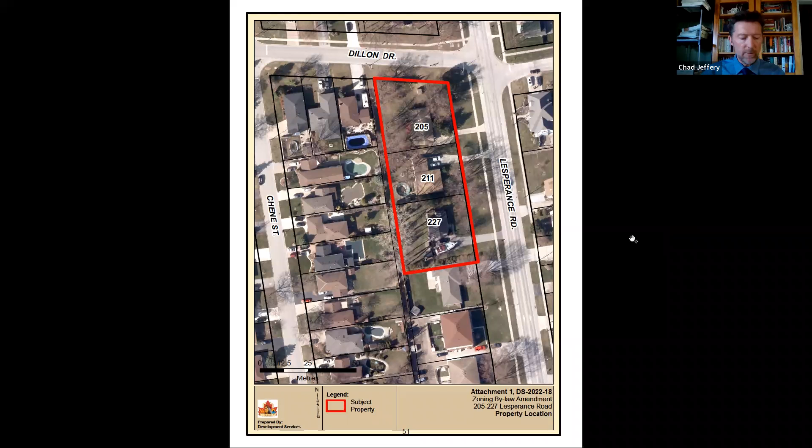Attachment 2, please. The surrounding area is predominantly low density residential, denoted in the yellow tinge, with the subject property outlined in red again. Farther north at the intersection of Riverside Drive and Lesperance Road is a commercial node, and to the south, shaded in orange, there are 2-story 4-unit dwellings, south of which is a medical office at the corner of Little River Boulevard and Lesperance Road. Farther west along Little River, on the south side, is the Arrowhead Municipal Park. Along the west side of the subject property is also a 10-foot wide municipal alley that contains hydro utilities, but it doesn't form part of the subject property.

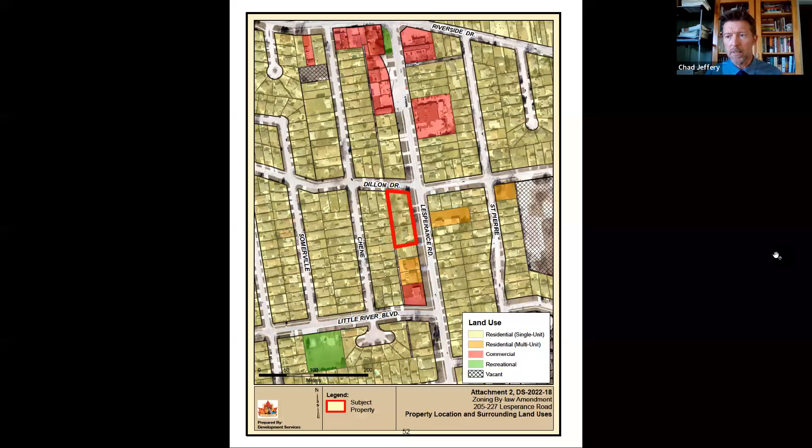If we could turn to Attachment 6, please. This shows the existing zoning as R3. Again, as the mayor noted, the proposal is to change that from Residential Zone 3 to a site-specific R3 zone that would facilitate 4 dwellings for a total of 24 units. I should note that the current R3 zone, which applies to the property and surrounding area, permits multi-unit dwellings such as townhouses or row houses at a height of 10.3 meters, but doesn't permit the 6-unit apartment style dwellings proposed through this application.

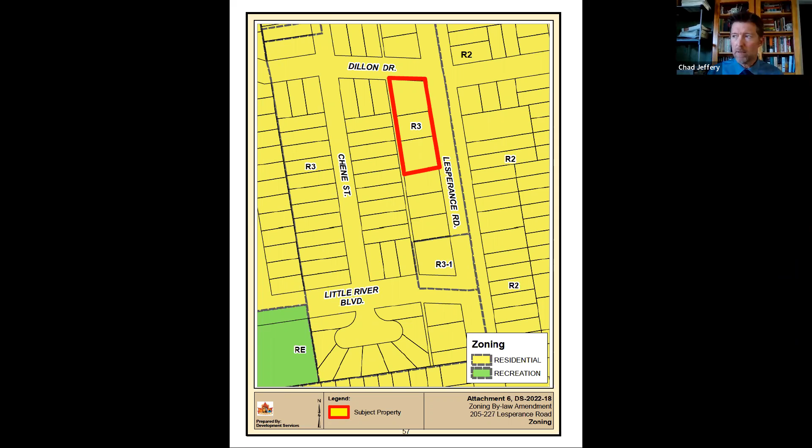Attachments 3, 4A, and 4B in our report show the proposal: 4 buildings of 2.5-story, 6-unit dwellings with two-bedroom units, floor area of 1,400 square feet. There's a sidewalk to each dwelling unit from Lesperance Road, and a centralized amenity space in between the units, about midway down the subject property. A 37-car parking area exists to the west of the dwellings, and there's going to be a 5-foot landscape buffer strip along the westerly side of the subject property that will include either cedar trees or a fence, or perhaps both. That kind of detail will be determined through the site plan control process.

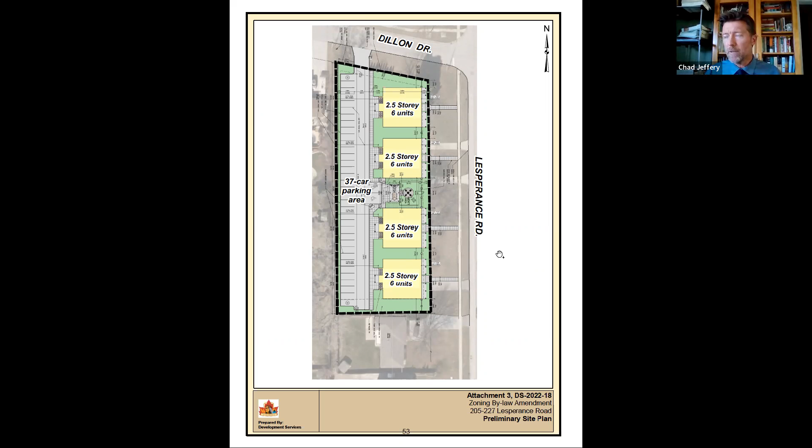The first floor of these units is partially underground, which is why it's only 2.5 stories in height. The proponents have provided, in attachments 4A and 4B, an artist's or architectural rendering of what the properties look like. At the top, you see a bird's eye view looking toward Lesperance Road from the west. The one on the bottom is looking from the east from Lesperance Road, showing the front of the dwellings.

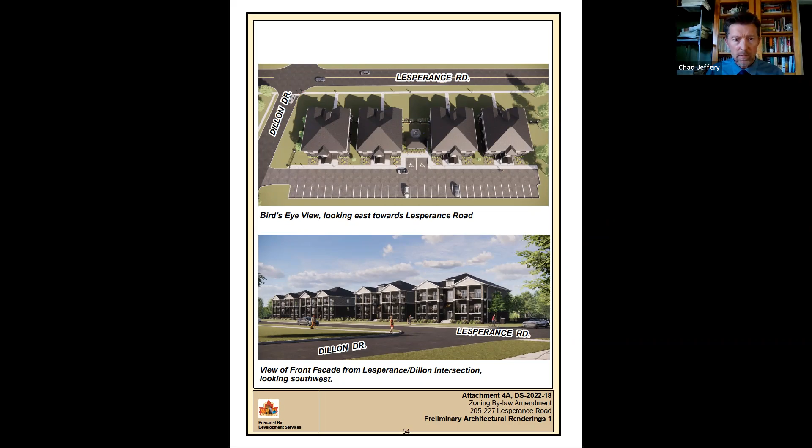The next shows different perspectives. Again, that's from the west looking east, gives you an idea of what the rear facades will look like across the parking lot. And then there's a view of the central amenity area at the bottom of that attachment.

The proponents have submitted supporting documents. In order for us to deem the application complete, they had to provide a planning justification report, a traffic impact brief, and a sanitary assessment.

Those reports came back indicating that it represents good planning, that it will have marginal impact on traffic operations, won't have an adverse impact on traffic operations in the area, and that there is sanitary capacity to accommodate this development. Administration has reviewed these reports and concurs with their findings.

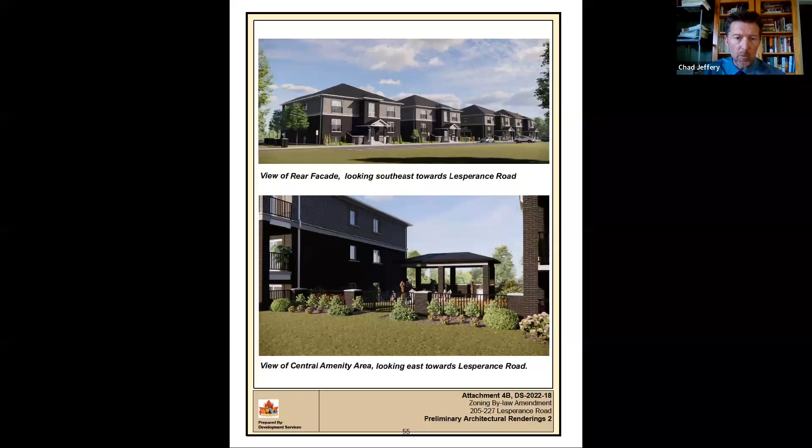We've also looked at this proposal in the context of the relevant policy documents, which are the provincial policy statement, the county official plan, and the town's official plan. Each of those documents is highly supportive of residential infill development, compact built form, making more efficient use of services, and providing for a range of housing types and tenures.

This proposal checks a lot of the boxes included in those policy documents. We've concluded that the proposal is generally consistent with the PPS, the provincial policy statement, and conforms to the county OP and the town's official plan.

Now, the council is not making a decision on the application tonight, because this is a public meeting for the purpose of receiving input from interested stakeholders. After this meeting, and after we've had a chance to address as many questions as possible, there will be a further report that will summarize the issues we've heard tonight and making a recommendation to council on the proposed zoning bylaw amendment. So, Mr. Mayor, those are my comments.

I will be available for any questions that council may have. All right, thank you very much, Mr. Jeffery. So then we'll go right into our delegations.

And our first delegation this afternoon is Mr. Christian Lefebvre, as the applicant, and Mr. Harry Froussios, the planner on said properties. So I will certainly turn the floor to both of you.

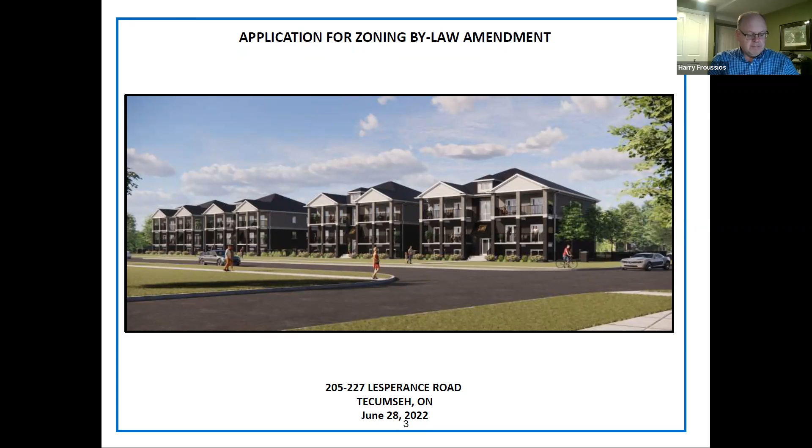As you've already seen in the previous slide, this property is located at the north end of the town of Tecumseh at the intersection of Lesperance and Dillon Drive at the southwest corner. Surrounding land uses include the commercial node to the north at Riverside Drive and Lesperance Road. There's residential uses in all directions immediately abutting to the west and to the south and across Lesperance and Dillon Drive, including multi-unit residential to the east, existing fourplexes to the south. There are also open space and recreational uses within walking distance of the subject property. Next slide, please.

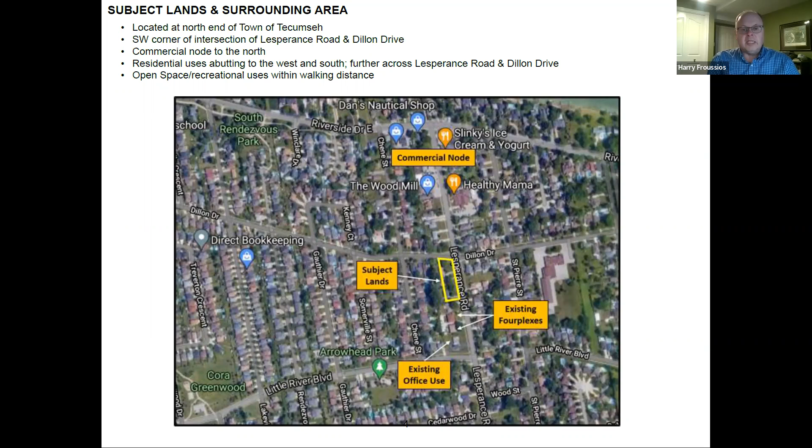And this is the subject lands. Just to orient yourselves, north is pointing to the left of the screen. As noted, it's 3 individual properties that have a combined area of just under 0.4 hectares and 1 acre. Frontage and access is along Lesperance Road and Dillon Drive. 3 standalone single detached dwellings are to be demolished as of today, to make way for the proposed development subject to the rezoning application that's before you tonight. Next slide, please.

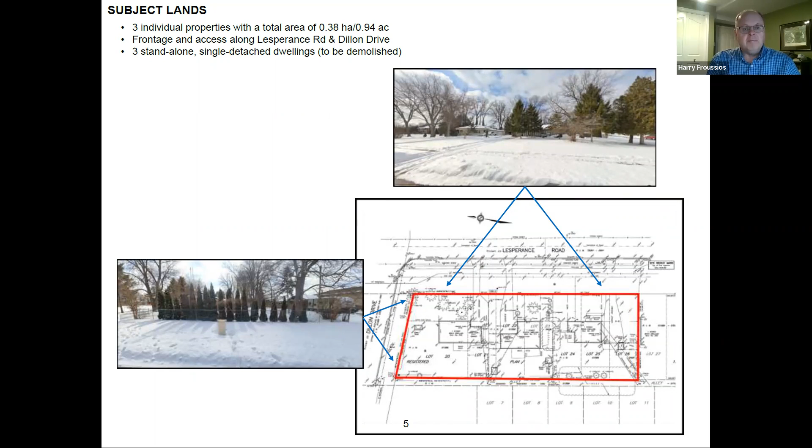In terms of the policy structure with the town of Tecumseh official plan, the lands are designated as residential neighborhoods in the community structure plan. They're within the town settlement boundary and within an urban area that is the focus of growth, public-private investment, and all significant development within the community. The subject lands are near a commercial node to the north, as well as community nodes within proximity of the subject lands. They're also located along a main road corridor, which is Lesperance Road. Next slide, please.

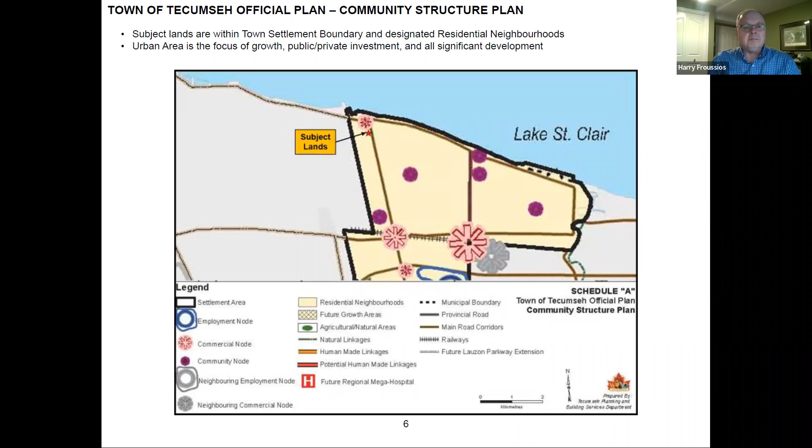In the North Settlement Area Land Use Plan, the subject lands are designated residential. The proposed form of housing, a 6-unit dwelling, and the density proposed is consistent with the type of housing considered appropriate within the high-density residential policies found within the residential designation.

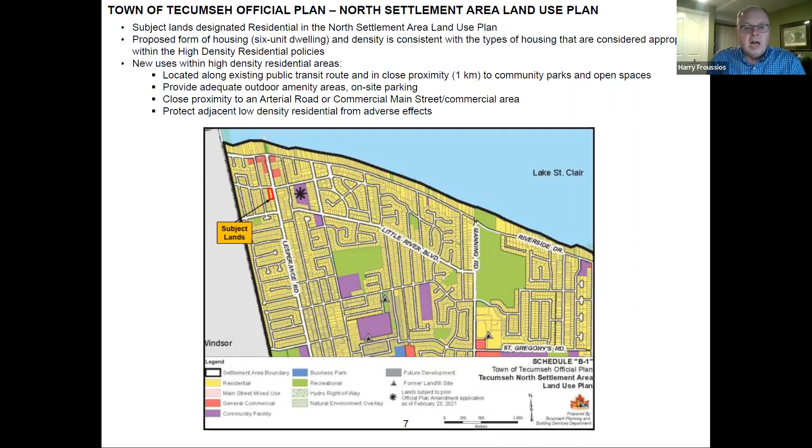For new uses proposed within high-density residential areas, there's a number of criteria we need to satisfy: the site must be located along an existing public transit route and in close proximity, approximately 1 kilometer, to community parks and open spaces; provide adequate outdoor amenity areas and on-site parking; be in close proximity to an arterial road or a commercial main street/commercial area; and protect adjacent low-density residential uses from adverse effects. As we will see in the upcoming slides, we satisfy all of those criteria.

In the zoning bylaws noted by Mr. Jeffery earlier, the subject lands are zoned Residential Zone 3, the R3 zone, which applies to the majority of the lands on the west side of Lesperance Road between Little River Boulevard and Riverside Drive.

A wide range of uses are permitted in the R3 zone, including single detached, semi-detached, and multi-unit type dwellings, such as duplex, triplex, and townhouses. A maximum residential density of 30 units per hectare is already permitted, and a maximum height of 10.6 meters is also permitted in the R3 zone.

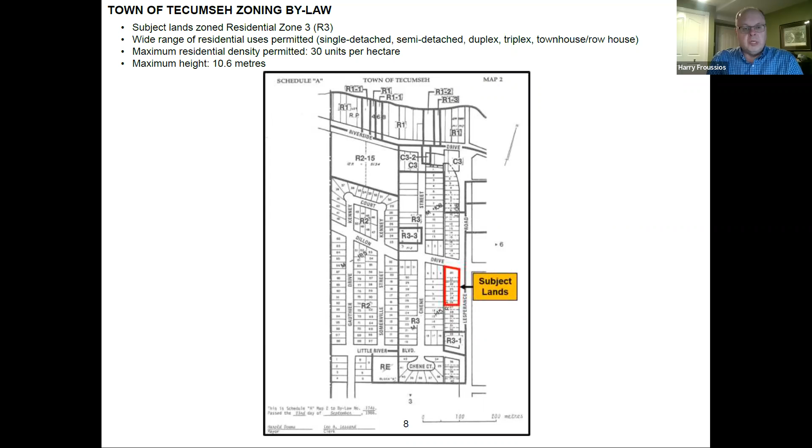Now we get into the proposed development of the subject lands. This is the site plan provided as part of the rezoning application. The proposal is for four 2.5-story, 6-unit dwellings, a total of 24 dwelling units on the subject property. The front entrances will face Lesperance Road with direct pedestrian access to each building from the public sidewalk. You might see the existing accesses underlaid on the image in front of you; those will be removed, and access will be provided solely off of Dillon Drive.

There are a total of 37 parking spaces provided to suit the minimum requirement in the zoning bylaw. There will be a shared outdoor amenity space, partly sheltered and partly uncovered. A total of 35% landscaped open space will be provided, beyond what is required in the zoning bylaw. A density of 63 units per hectare is proposed with the 24 dwelling units, and a building height of 9.75 meters is proposed. As we recently noted, the R3 zone permits a height of 10.6 meters.

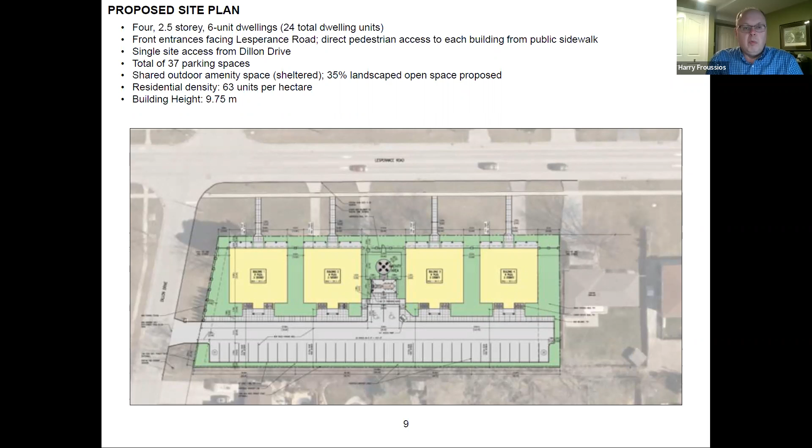As was also noted, there's the city-owned hydro corridor at the bottom of the site plan, which provides additional buffering from the abutting residents to the west. Of course, this will be subject to a future site plan application, assuming the zoning bylaw moves forward and is approved. We will be filing for site plan approval in the near future.

This is the front of the buildings facing Lesperance Road. You can see private balconies that also face the street to help animate the streetscape and avoid potential overlook issues with the abutting residential uses to the west.

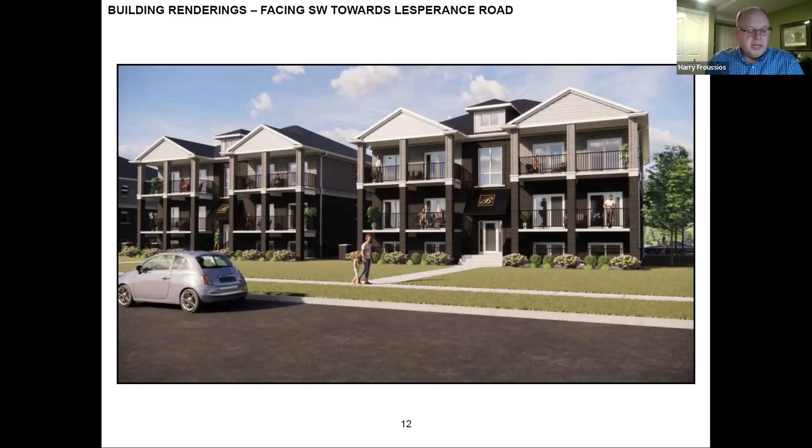This is just more of a close-up of the fronts of the buildings, showing the variety of building materials and colors that will be provided on the site, as well as a sufficient amount of glazing to add interest to the built form.

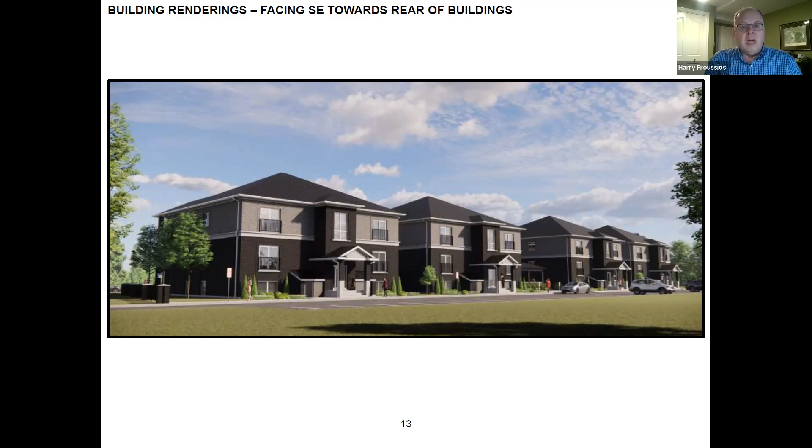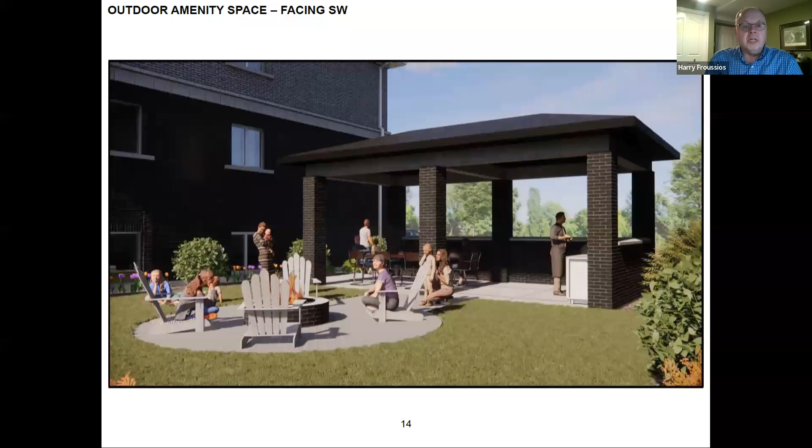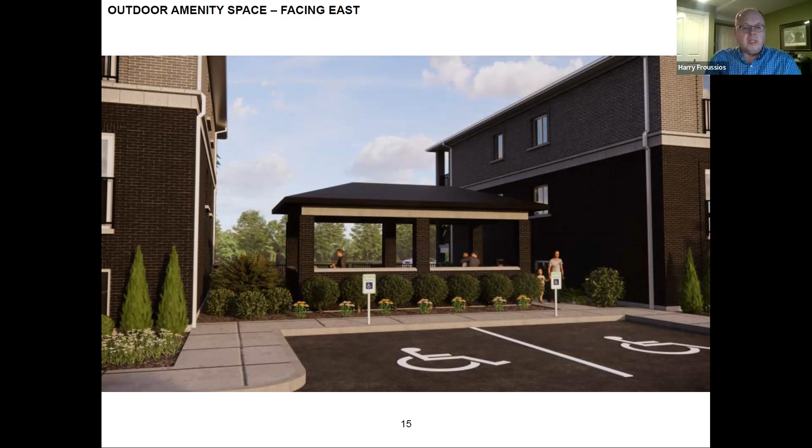To permit a maximum lot coverage of 35%, whereas a maximum of 30% is currently permitted. Permit site-specific yard setbacks from the front being 3 meters, the front again being the north property line abutting Dillon Drive. The opposite at the rear would be 6 meters abutting residential use. The interior west yard of 15 meters, which would be to our neighbors to the west, providing sufficient setback from those buildings. Then an exterior yard along Lesperance of 3 meters.

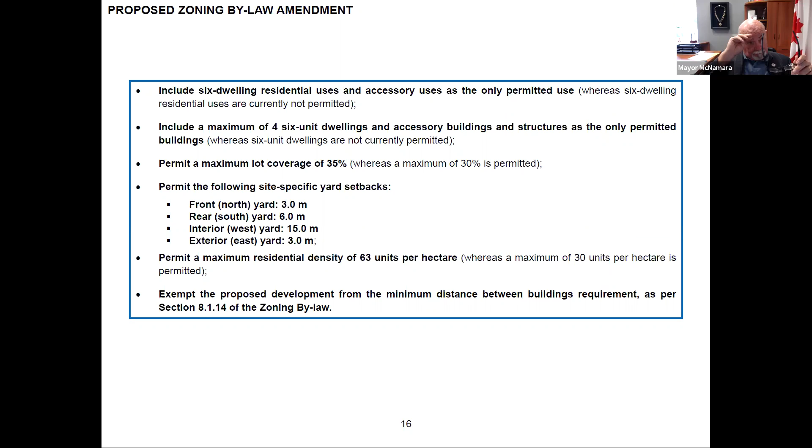We're asking for a maximum residential density of 63 units per hectare, where a maximum of 30 units is currently permitted, and to exempt the proposed development from the minimum distance between buildings requirement. What we're proposing is to make sure that the proposed development meets the Ontario Building Code requirements.

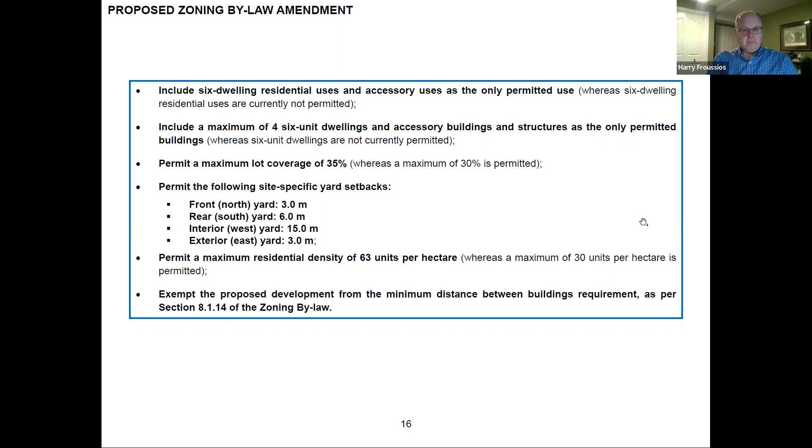As part of our planning rationale provided with our report, we believe that the proposed site-specific zone regulations promote appropriate development standards to support increased residential density, and promote intensification in accordance with the residential designation and the provincial policy statement. Adverse impacts are not anticipated on adjacent residential and commercial land uses, and existing residential uses are adequately separated from the subject lands. This will all be determined in more technical detail through the site plan approval process.

The proposed amendments are consistent with the provincial policy statement that encourages a range and mix of land uses to support development, redevelopment, and intensification in settlement areas, as well as make efficient use of municipal infrastructure. Both the county OP and the town official plan contemplate this type of development at appropriate locations, and both plans encourage development, redevelopment, and intensification in settlement areas.

This development fulfills a need within Tecumseh that can accommodate existing residents as well as attract new residents to the town. The proposed exception zones are consistent with the provincial policy statement and in conformity with both the county and the town official plans.

As I noted earlier, this development would be subject to site plan approval, where matters relating to compatibility with our abutting neighbors would be addressed in more detail.

In addition, the location of the lands are along a transit route, near a commercial node, community facilities, and open space recreational opportunities that provide opportunities for alternative modes of transportation and ease of accessibility to desired community facilities. The site can accommodate the proposed development, including adequate landscaping, on-site parking, amenity features, and buffering from adjacent properties.